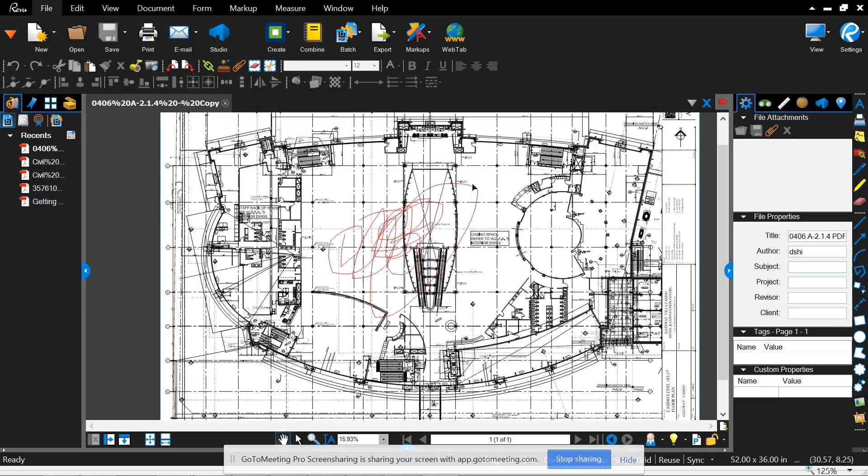Sure, okay, so let's dive in. While you were talking, I went ahead and opened a file that was in ProjectDox using Bluebeam. So this is Bluebeam, I made a scribble scrabble on it and saved it. Okay, so I'm done. Notice that was this top file right here, and it's got a red up arrow on the Bluebeam icon. So those that are available to be opened by Bluebeam have the Bluebeam icon underneath the file. I opened it, I made some marks, and now I need to put it back.

I'm going to go ahead and say OK. Once I click on the Bluebeam icon, it's asking if I want to upload the new version. I'm going to say yes. It's going to take a minute or so. And there we go, it tells me that it was done. So if I come over here and do a quick refresh on my list, you'll notice that it versioned the file.

You're acting as the reviewer? I am, yes. Okay, so as the reviewer, when you make markups or plan review marks, change marks, that's going to create a new version? That's correct. That's how we can track what's going on within Bluebeam.

And hey Chris, to follow up on Michelle's question, I noticed that the file was checked out when you opened it. Can only one person open it in Bluebeam at a time? That is correct. That is a limitation of using Bluebeam versus the Brava viewer.

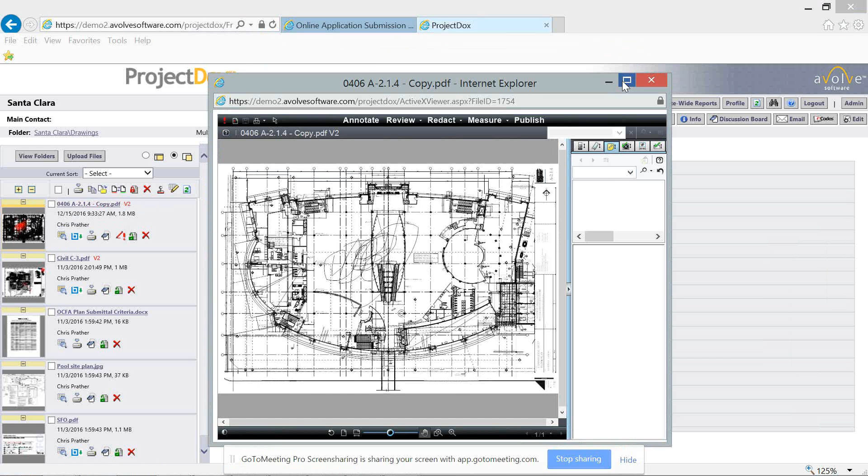Let me just do something really quick. What a hideous color, yellow.

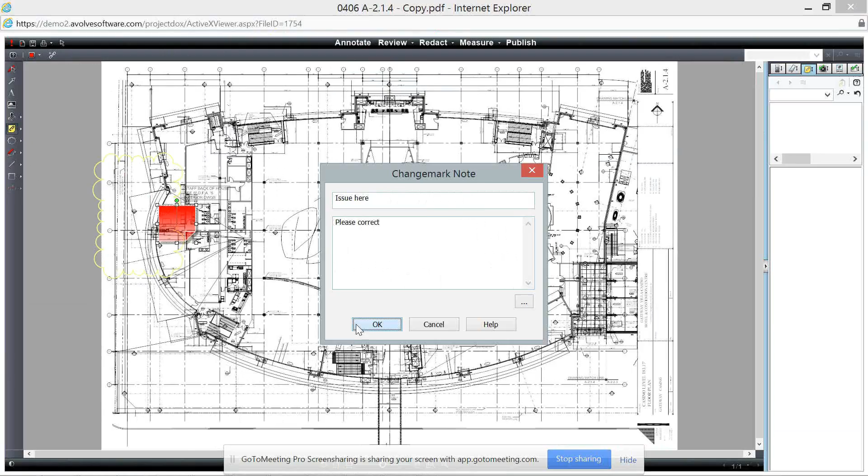While you're doing that, if someone's working and checked out a file in Bluebeam, can other people still be working in Brava on that same file? That's an excellent question, I'm going to have to test that. I do not know the answer.

In my experience, if that lock, that green keypad or padlock, is red, no one can edit in the version we're using today. So when I see that padlock go red, my guess is no one can edit.

You guys are using checkout functionality then, is that right? No, well, that's a great question. We have that feature, and we would like for that icon to go away completely.

There's no reason for any of our plan reviewers to ever check out a file, and Michelle and I are having to go in as sysadmins and unlock files because people are accidentally doing it, but we don't have a need for it.

Chris, that functionality to check in and check out files is inherent to the ability to create change marks, so we can't turn it off. We'd have to ask Duane how to turn that off, or ask for an enhancement. Okay.

So I am in Brava, and I'm actually looking at both change marks - Brava change marks and Bluebeam change marks. The moral of that story is that the reporting is going to pull the same information. Again, the variation would be these naming conventions around the change marks, right?

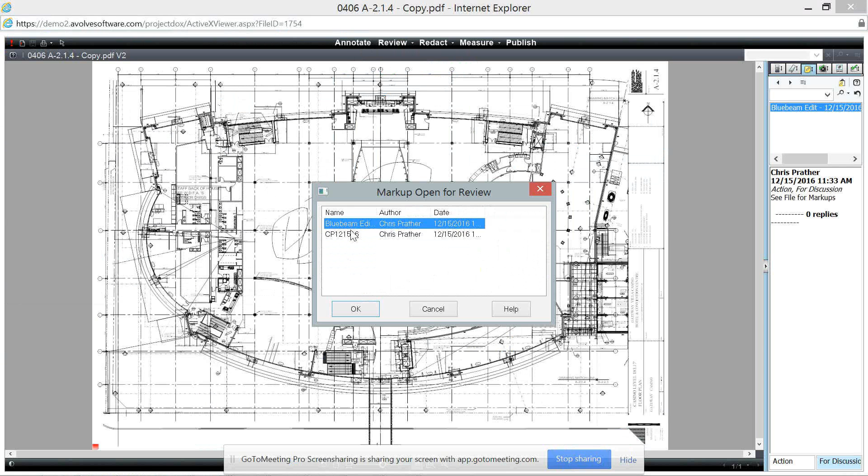So if I go to the Bluebeam edit, there we are, capturing who did it and when they did it. So we do have some metadata associated with them.

But for the applicant, it's not going to be easy for them to find out that information. I'm wondering about the applicant, because when they go in to look at this, is it going to be easy for them to find that metadata information?

They're going to have to click the Bluebeam edit to figure out who made that edit. Because right now, we've been talking about showing them how to sort those different change marks so they can have all the review stuff together, all the planning, all the public works together. But with the Bluebeam thing, it's going to make that real difficult, I think.

Because all of them are going to show up as Bluebeam edit, and the only way you can find out who made it, you're going to have to click it. So you're saying the only way to find out who made it is you're going to have to highlight whatever that edit is, right?

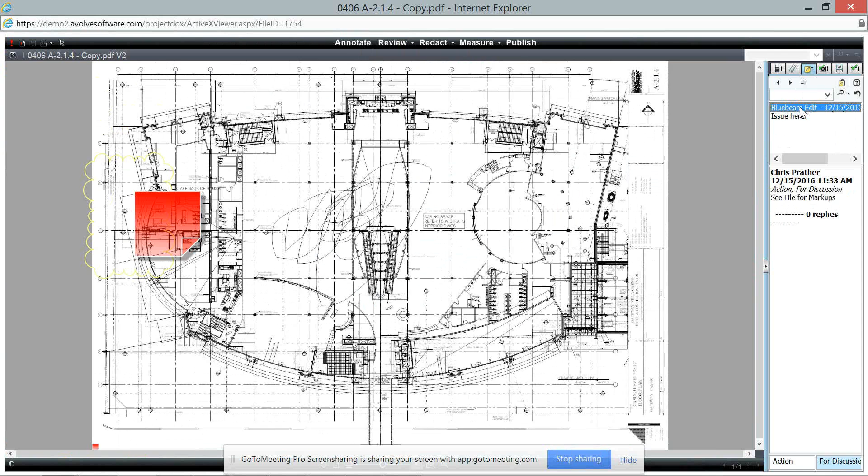Yes. How did you get to this metadata? I clicked on the change mark. So they're going to have to go and click on every Bluebeam edit change mark to find out who made that edit.

No, not necessarily. It'll also be in the e-form, with the listing of change marks that they have today. Bluebeam's change marks will be there as well, and that metadata does come through.

Okay, and could you show us what the change mark report looks like with the Bluebeam edit? Yeah, I didn't have one, I was actually pushing workflow while we were chatting. So let's keep chatting while I push some workflow through so we can see that.

Other questions while I do this? Yeah, I do have a question. So the Bluebeam edit I see here, you did those yellow clouds, but then you went into Brava to do the change mark icon so it would show up, correct?

I just opened Brava as an example of how to see both Brava and Bluebeam change marks. Right, so my concern is if somebody does a change mark in Bluebeam, or somebody does a markup in Bluebeam, it doesn't have the change mark capability.

It'll just say Bluebeam. In other words, right now the reason we see the data on the right-hand side in the box is because that's a change mark. See what I'm saying? In other words, the only way we can see when we create markups now in Brava...

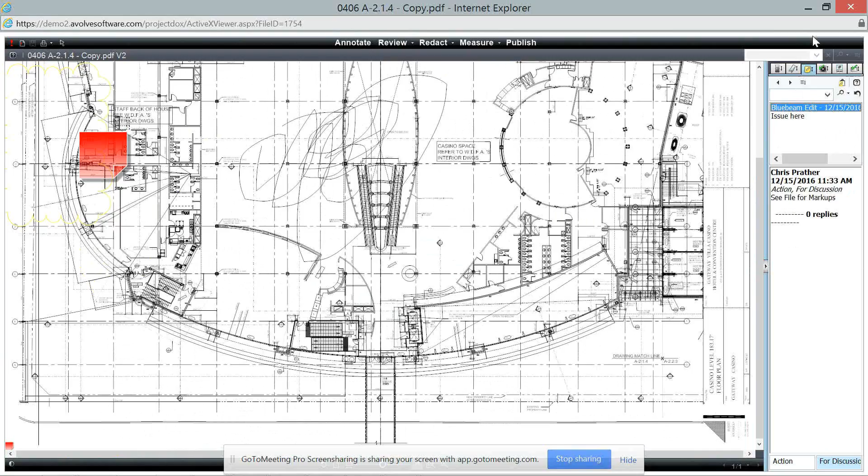It would be, because it's actually a new version of the file. The change marks aren't documented in Bluebeam, or they are documented in Bluebeam, but when they come into ProjectDox, it's the upload process of adding a new file that captures that information.

No, I don't think we're talking about the same thing. When a reviewer is reviewing a plan and they do a markup instead of a change mark, that markup does not show in any kind of reports at all currently right now.

So what we're having to tell our reviewers to do, if they create a markup, is to draw an arrow and create a change mark so that we could put data in there, a subject and content, for example. Following me? Yes.

Okay, so now my concern is that sheet you just showed me that had the Bluebeam markup on it, it appears that if you have a Bluebeam markup, in order for it to show up in that change mark report, you would actually have to draw an arrow and create a change mark. No? Yes?

Yes, that is correct.

There wasn't any text or anything associated with saying what that was. I'm sorry, if that's a question, I can't hear it.

We were just processing, sorry. Okay, let me... come on... okay.

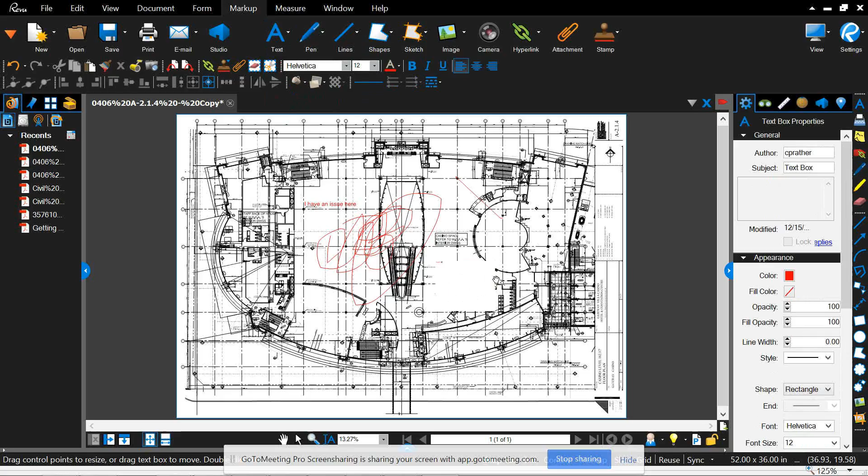Would it preserve if the file got checked out or downloaded and 50 comments were made in Bluebeam amongst various reviewers, and that marked up file was placed back into the drawings folder - it would version the file, but preserve any markups in Brava that somebody else had done, is that what you're saying? Good question, Andrew. Yes, that's what I'm saying.

Okay, and now I made 2 or 3 marks in that time frame. I'm uploading a new version, and we'll go look at the e-form. So right now he's got version 4 here, but we should be able to see the Brava markup from version 1, is what you're asking, right Andrew? That version didn't change because of Brava is the point, but the Brava markups are still available.

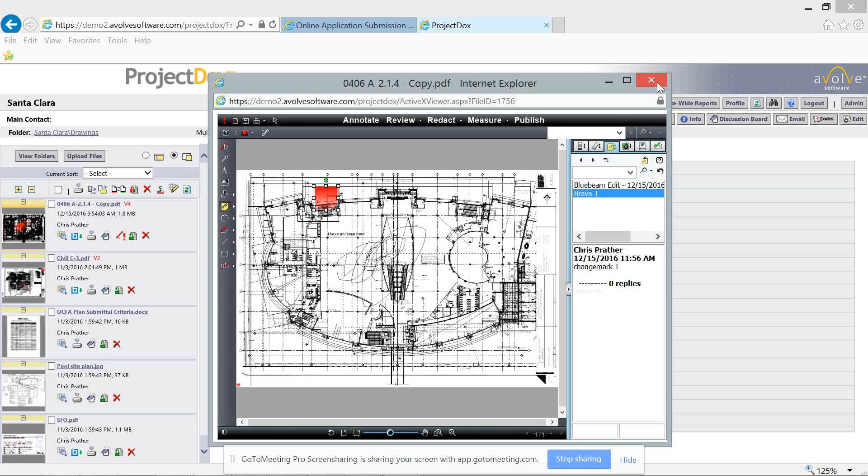Okay, I'll open it to show. Of course we've only got... let me make another mark on here. Let's put this change mark here. Okay, so now that I've made a change mark, it's not gonna version the file like Bluebeam, right? I'm gonna come out of here, it's gonna ask me if I wanted to save those. Obviously, CP change mark 1. Okay.

So that change mark is on there. We did not version the file. Let me refresh just to show you that. So we refresh - no change in version, but we still have the Brava markup in there.

If I come over here to our e-form, I've got 3 markups. One was the one I did by itself in Bluebeam. The second was my second opening of Bluebeam and making 2, 3, 4 marks on that file. And then the third was the Brava one, and here they are.

So going back to your change mark question, I've opened it twice with Bluebeam. So let's just say it was 2 different people, right? If I'm a plumbing reviewer in Bluebeam, all of my change marks are 1, right? There they are - there's that first one with the scribble scrabble and the text box. The second person that went in and made their changes got another update, and they're really small.

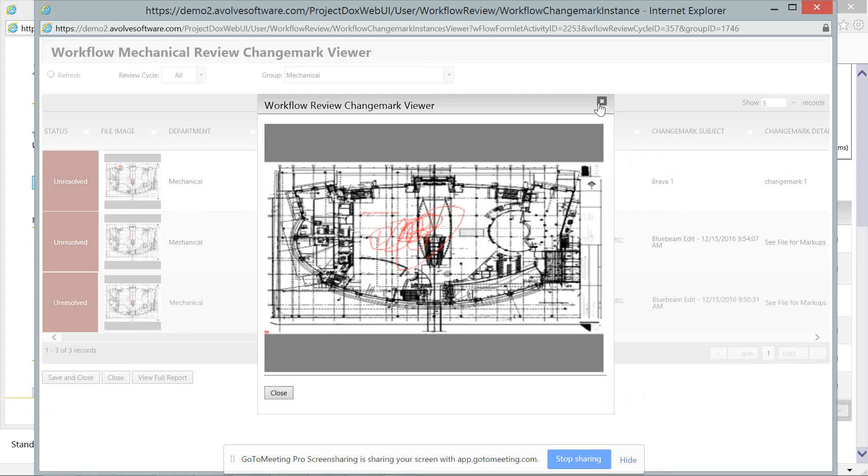Some of the metadata came through. You have to open the file to see those markups, those changes. Unlike in the Brava viewer, the change mark, the sticky note, or whatever you guys are using, where you mandated that each issue gets a change mark - that functionality doesn't hold true in Bluebeam. And that, I think, was your question. Yeah.

The other thing, Andrew, Leela, and Ralph, that we need to consider is the fact that if Bluebeam creates all these versions every time a sheet is updated, that could become confusing as to what cycle we're in, I guess. Yeah, sure. It could. There's no denying that, but we do maintain cycle separately.

That's true, in the reporting you're able to do that. Now, I noticed in our version right now, I don't know if that's changed in this version, a couple of things, and it's probably superficial, but it's huge when it comes to the applicant's use of ease. For example, if you have this particular report with 50 change marks on it, when you scroll over to page 4 or 5, you lose your titles. They don't scroll with each page.